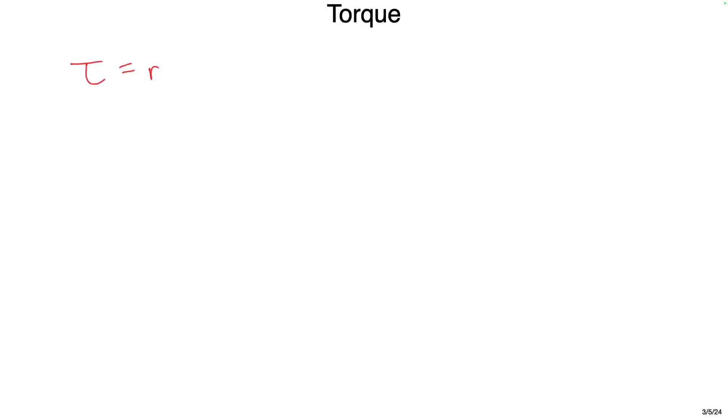Your book writes this as F times L, where L is some sort of lever arm. I'm going to write this as a little bit of a Mr. Baloghism, but I've seen other physicists do this, and it's a notation I really like. I'm going to write a distance, r, a radius, like a distance from an axis of rotation. Then an upside down T, and then I'm gonna put an F right there.

So that upside down T looking symbol means perpendicular to. The reason I like writing it like this, as opposed to the way your book writes it, and it's not wrong, your book says F times L, is that I need to be reminded of something. I'm applying a force to this thing that I want to cause to rotate.

But critically, the force that I'm applying, which is directed outwards from the door handle as I pull on it, needs to be perpendicular to my distance from the hinge. My distance from the hinge goes from the hinge through the door all the way to this point. And then perpendicular to it, I can apply the torque. What happens if my force is not perpendicular to that? No torque takes place, right?

So I choose to write it as r perpendicular to F. That's what that symbology means, because personally I need the reminder. I need to be triggered into, oh yeah, I need perpendicular things. Because what happens if I pull not perpendicular?

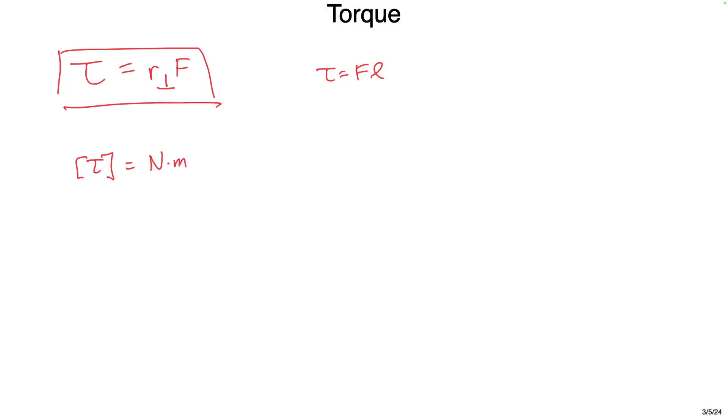Anybody that's ever worked on a piece of equipment and has worked with torque has probably measured that torque in foot-pounds. Feet for the distance, pounds for the force. It's just the imperial system's version of it. Okay. And no special name here when it comes to torque for a Newton times a meter.

So let's talk equilibrium. Equilibrium is an easier place to start when it comes to talking about torque, because what we're segueing into here is how do we do forces in rotation. We've done kinematics in rotation, but now we're trying to do Newton's laws in rotation, okay? First law, third law, they still apply. Second law gets a little bit different. We are going to apply a torque. Notice I pull down my distance from the center of the wheel to where I'm pulling. I pull down tangent, perpendicular to that distance, to that radius.

If I apply a torque, what does it cause to happen? Rotation, right? So torques are rotational forces. It's the idea of force, but in this whole sense of rotation. It causes alphas to happen, okay? But when it comes to static equilibrium, which we talked about in the last unit,

we are trying to achieve a situation where you add up all the forces on that bridge, and what do you want the answer to be? What must the acceleration of the Golden Gate Bridge be at all times? 0. Because if it's not 0, the bridge's motion is changing somehow. In a linear sense, if we add up all the forces equal to 0, we don't want it accelerating up or down, in or out, or right or left. We can go in all 3 dimensions if we needed to. So we want the acceleration of the Golden Gate Bridge to be 0.

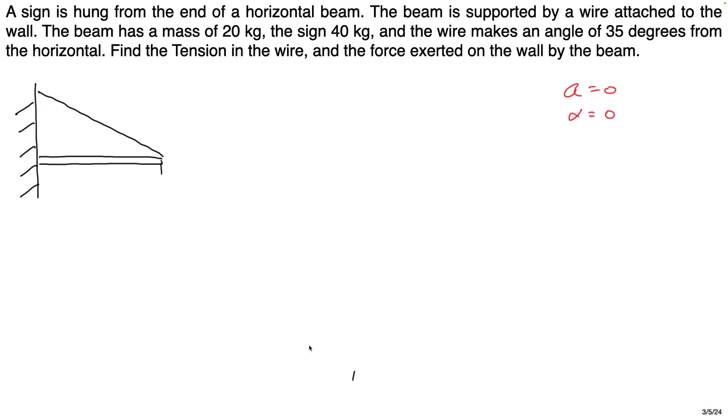So here's the wall, this is all solid. Here's the beam, and you're gonna see pictures similar to this, okay? The beam could be at an angle or something like that. I'm doing a horizontal beam for you at first here. And then there's this wire that's attached to the end of the beam. And then there's like a sign hanging off the end of the beam here, okay?

Yes, no? No. No, definitely not. If you ever see me running for public office, something has gone horribly wrong. Like the aliens have arrived and they've taken over my body, shoot me now, right? Okay? Besides, you don't want me for president. Very first thing I do on my first day as president, executive order, sweats are now considered appropriate attire for every situation, right? Second, all SUVs are banned. I've got a long list, I could keep going, but yeah. No, you don't want me for president, so let's erase that.

We'll just put a little object here. Another thing that's happening to you for the first time is that up till now in this class, it really hasn't mattered what the physical dimensions of an object are. I mean, it's been a tungsten cube or a penguin or whatever sliding down the hill, right? Or a car rolling down the hill. We never had to consider how big the car was or where the wheels were, any of that kind of stuff. Well, now it does matter. Torques depend on where these forces are applied. The lengths of things are going to matter now.

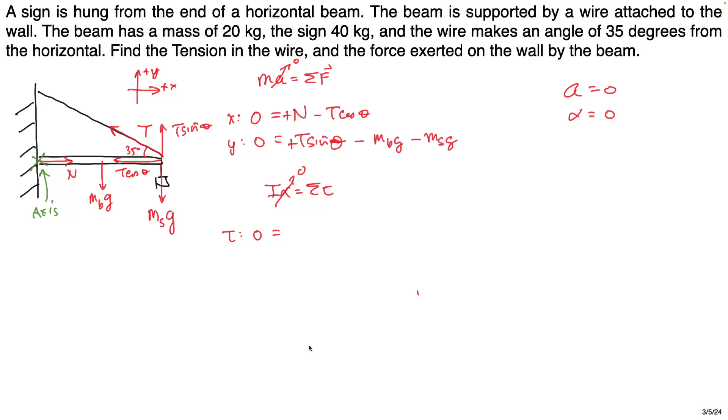It's the wall. It's the only other point of contact, right? Which way does the force in the wall have to be pointing in order to counteract a counterclockwise torque? It has to do a clockwise torque, which means there has to be a force right there that can keep this in equilibrium.

We can't invent forces. Forces must come from the interaction of two objects. So what are the objects here? The beam and the wall. Well, we've already got the normal force, Mr. Balogh. So what's this? Can you name the force that acts upward that is perpendicular to the normal force? How fun is this? Not fun at all, Mr. Balogh. It's static friction. It has to be there.

If static friction weren't there, if I had a situation where this thing was sticking out of the door like this, and I put a string right here, I have a normal force, but if this was frictionless, what would this do? It would just slide out, wouldn't it? This is why you want to put an axis on this end and figure out if you've got balanced torque. And then pick a different spot and see if you can do the same thing. It's going to uncover mistakes.

So be sure to, even though I've only written down one axis and it's the one I'm going to use, do that quick conceptual check. And then you'll be not guaranteed, but 99% of the way to figuring out if you've missed something somewhere. Because it is easy to miss. There's a lot of stuff to keep track of.

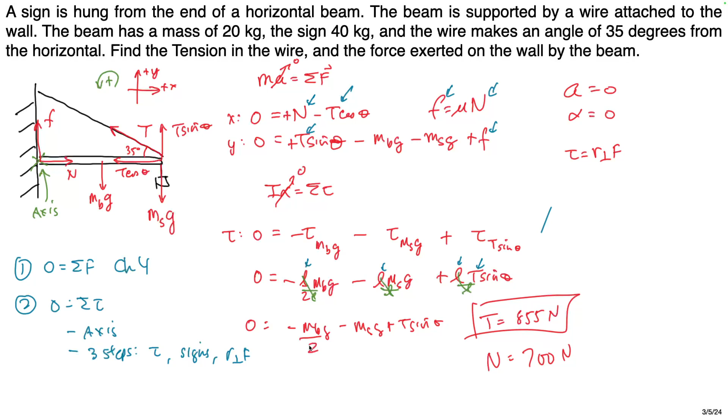But those are the additional steps or processes that you need to go through in the strategizing part. We've got a visualization and a strategy, and then it develops this huge math mess. But we could have expected that. It's Newton's second law, so you know it's just going to get real messy real fast. Let's get into some other parts of this, that I'm hoping as we move forward and get into the blissful realm that is energy, will help make a little bit of sense.

But before we get there, I do need to talk about rotational mass. So far we've been defining angular things that are related to linear things. We did it with kinematics, where instead of V we had an omega, instead of A we had an alpha, and now instead of force we have a tau for a torque. These are rotational analogs for all these things.

Newton's second law, in its linear form, relates linear acceleration to straight line linear forces. We know that forces in rotation are called torques. We know those torques will cause alphas, right? If I apply a torque to this wheel, I've changed the motion of the wheel. It went from 0 and now it's not 0, so there had to be an alpha. The omega changed here by the application of my torque. And this torque can either cause it to have positive alpha or negative alpha. The question is, what about mass?

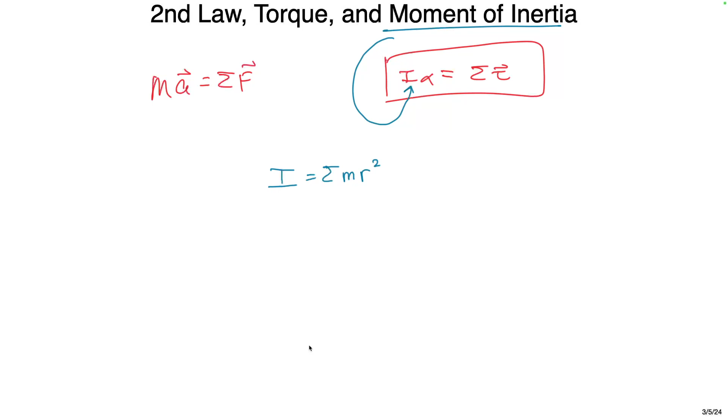And for those of you that are in calculus class, if you cut something up into a bunch of little pieces and then add all those pieces up together, what are you doing? You're doing integrals. Trying to look for the terror in your eyes. I'm writing sums because I'm not allowed to do calculus in this class. But really, we can integrate over these shapes. And luckily, somebody's done all those integrals for us. Namely, the author of your book and everybody else on the internet.

And we have a table. This is actually the table I'm going to put on the exam for you, so that you have this as a reference. You don't need to put this on your cheat sheet. I will give you the moments of inertia for objects via this table. But this table consists of most of the basic shapes that all objects can be made out of. So for example, if I wanted to find the moment of inertia of a bowling ball, which one of these things would you pick? Yeah, solid sphere.

Not thin-walled hollow sphere. That's fancy words for, what is this thing? What's a thin-walled hollow sphere that gets tossed into a basket? A basketball, right? Or a soccer ball. What's the difference between a thin-walled hollow sphere and a solid sphere? It's where the mass is located. A bowling ball is solid or mostly solid throughout. They change the material on the inside, but we can consider it all solid all the way through. But a basketball is filled with air, which compared to the rubber of the ball is more or less negligible. And so that would be a thin wall.

And the reason I can do all that is because all of these things share a common axis, axis through the center, all that kind of stuff. So the table's pretty powerful, and we're going to reference it quite a bit moving forward. When we need to know an object's moment of inertia, I'm going to be like, table. What is the closest thing from the table to model whatever the object happens to be? I did capture that into the PDF here, so that will be in the notes.

Okay, so let's finish up with starting an example of how to use moment of inertia and Newton's second law in rotational terms. We've got angular accelerations, we've got radii and masses, and they want us to find a coefficient of kinetic friction. This is a force problem, like a chapter 4 Newton's law problem, but now it's in rotation, which means it's chapter 9. We've got to identify which toolbox we're working with. Coefficient of friction normally would come out of a chapter 4 problem, sometimes out of conservation of energy, but we haven't done that yet. We'll do that on Thursday.

So the big picture is that I'm going to be using Newton's second law in its rotational form to figure this problem out. So that means I need a free body diagram. The central actor in this problem is the potter's wheel. It's the thing that's rotating, the thing that's going to experience friction. What do we know? We know there's a 70 Newton force. This is like a top-down view. I put a picture of a potter's wheel down there.

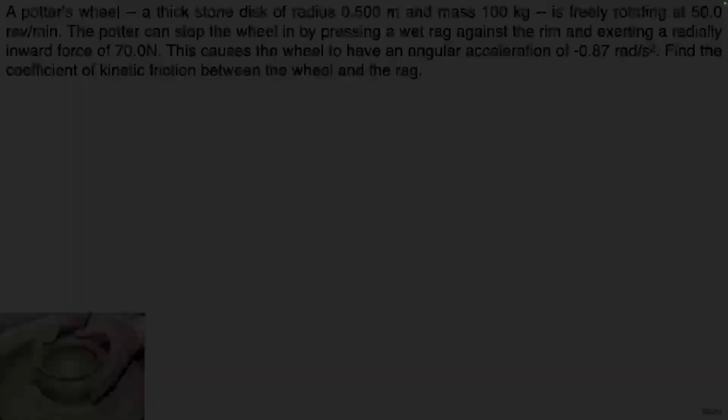But now can I find that coefficient? I know the normal force, I know the radius. I've got to find alpha and I've got to find I. What am I going to do for the moment of inertia? What does the potter's wheel look like? I would pick the solid cylinder. It's like a solid disc, right? Okay. So the moment of inertia I'm going to use is 1/2 mass of the wheel, radius of the wheel squared, right?

My alpha. Now this is interesting. They gave me the alpha, didn't they? Negative 0.87 radians per second squared. So I'm good to go there. And now I've got all the pieces, and I'm out of time now, but you can solve for that mu. It turns out, by the way, to be 0.312, for those of you who have to know.

Woo, that's a lot, and I would posit that that's the hardest part of this unit, right, is coming to grips with what we did today. Tomorrow we've got center of mass, I'll teach you about it and we'll do a lab on it. Thursday we've got to do energy and momentum, both conserved quantities, so it's nice that they go together. And then we will have finished this unit and we will be into test mode for next week.